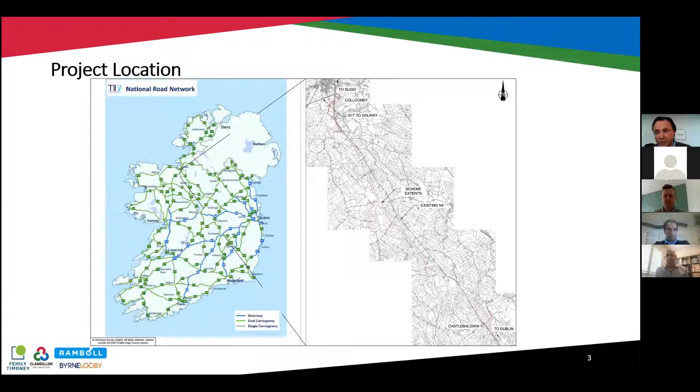The location of this project is just southeast of Sligo town and starts at the Toberbride roundabout in Collooney and heads down towards Castlebaldwin village. The first couple of kilometers are an online upgrade, and you can see the existing road there, hopefully in dark grey. The red outline is the limit of works, which shows where the new alignment is going. Most of it offline to the west of the existing road, curving around to the east and connecting up with Castlebaldwin village towards the south.

The background to the project, if anyone has driven that road in the past, they'll know that it's a single carriageway of varying carriageway widths and cross sections. There's a lot of existing accesses to it, with 24 junctions, a number of houses and field accesses, and that combination means that there's very limited opportunities for safe overtaking, and that's resulted in a number of fatalities over the years. One notable feature of the existing road is those white crosses that have been placed there by local action groups, which you will see if you're driving it in the past.

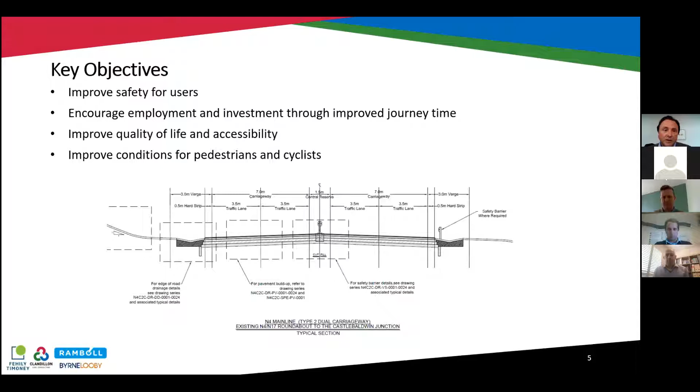So the key objective really is very much improving safety for users. But in addition to that, by reducing journey times, you encourage employment and investment in the region, increasing quality of life and accessibility. And of course, there's a lot of improvements can be made for pedestrians and cyclists in the area as well.

A bit of a timeline to the project. The planning submission would have gone into An Bord Pleanála back in 2013, and the environmental impact statement and compulsory purchase orders confirmed in 2014. They would have a notice to enter then in 2015, with advanced works, including extensive archaeological investigations and ground investigations completed 2016 to 2018. It is an area rich with archaeology and complex ground conditions. Procurement of a design build contractor occurred through 17 and 18, including your standard consultation meetings and the submission of a tender design from the competing parties. Ultimately, that led to an award to Roadbridge and ourselves as designers as the successful design build contractor, with that appointment occurring with government approval in January 2019.

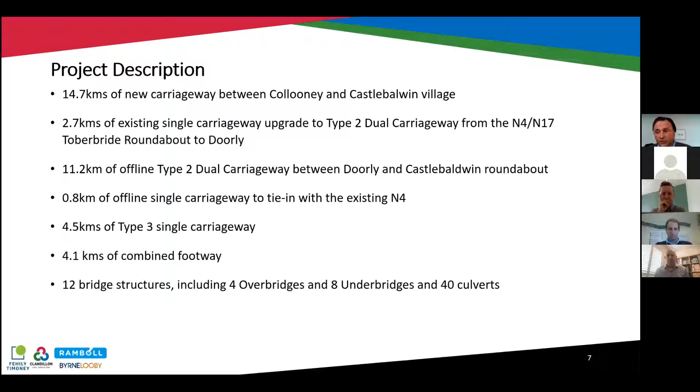Construction's been ongoing as well as design. Design is well done at this stage, but construction's ongoing with a road opening date, hopefully in Q3 of this year. The project itself, you'll hear more about from Sean and Brian and Billy. Essentially, it's 15 kilometres of new carriageway. A portion of that is online upgrade of the single carriageway to dual carriageway, about 11 kilometres of offline dual carriageway, a number of tie-ins and side roads to connect it in, as well as 4 kilometres of footway, a large number of structures, including 12 major bridge structures, 40 culverts, various minor structures of various types.

The key stakeholders: the sponsoring agency employer is Sligo County Council. Sanctioning authority is Transport Infrastructure Ireland. Employer's rep is Barry Transport. The main contractor is Roadbridge Limited. And then ourselves as designers, Fehily Timoney and Company, Clandillon Civil Consulting, Byrne Looby Partners, and Ramboll UK. And then with that, now I'll hand over to Brian, who will take you through the construction.

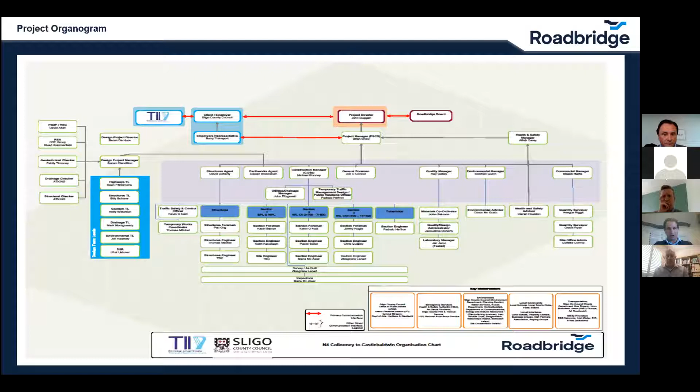Currently we have about 19 members of staff on site. Just a brief view of our organisation chart. At peak time last year, we had in the region of 34 members of staff. Again, at present, we have about 76 operators. At peak construction last year, we had 265 with 150 items of plant.

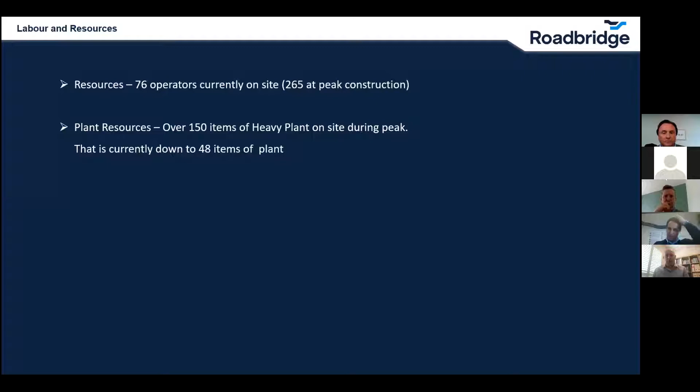Some high level figures in the project. We had 1.8 million cubes of cut material, with almost 1.1 of this cut unsuitable for road embankments. Testing of material was to determine suitability for placement in the earthwork embankment. Tested approximately 1 sample every 1,000 cubes.

All unsuitable material was managed within the LMA and disposed of in deposition areas or upfilling of borrow pits, of which we had 2 number on the project, where we processed and blasted rock to make 1C and 6F2 material. So you can see the numbers there with 220,000 cubes of 1C, 92,000 cubes of capping, 45 of sub-base, 30 of CBM, 24 of base course, 15 of binder and 11 of wearing course, high level numbers.

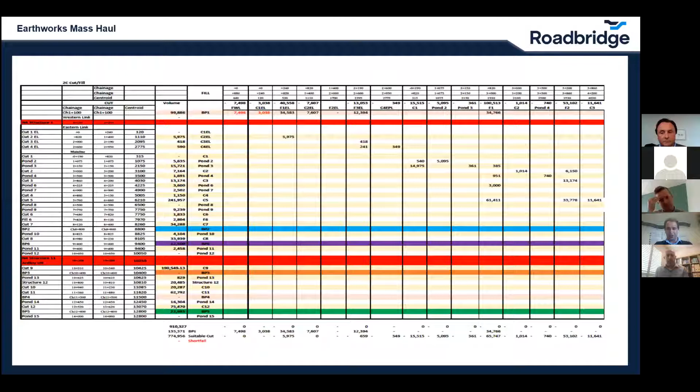There was a mass haul developed at the beginning of the project to ensure the most efficient haul distance used for cutting and filling material. Poor ground material proved a major challenge for us. Peat depths range from approximately 2 to 8 metres, which was a challenge. In peak construction during the summer of 2020, we were hauling about 100,000 cubes per week. Now, weather was a key factor, and in the northwest, it was always a challenge.

12 number structures in the project. First 2.5 kilometres of the N4 from the N17 roundabout to structure 2, which is just 2.5 kilometres. I suppose the scope of works initially was to remove this traffic from the main line onto the eastern parallel link to allow us construct these 2 bridges and the widening and overlay section, which included about 70,000 cubes of fill on the approach to structure 2.

The design of the local roads were generally offline of the existing footprint. Therefore, there was minimal disruption to road users. Road embankments were constructed offline, the bridge was constructed, and then there was a road order in place for a closure to complete the tie-in and divert traffic onto the new alignment.

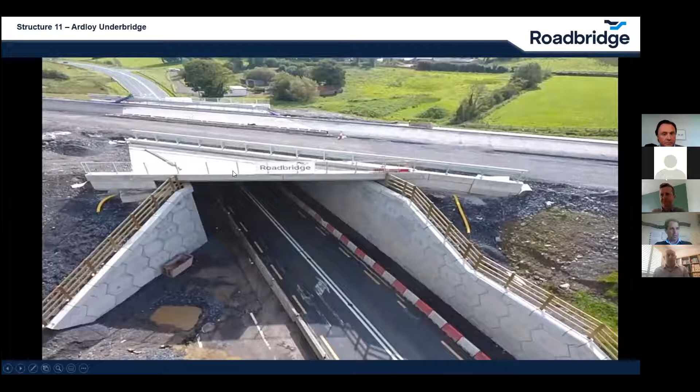Structure 11 at Ardloy then is the point where the existing and new alignment intersect. The structure was constructed without any road closures. The beam lift took place in December 2019, was carried out at night time, and was carried out again with minimum disruption to road users. Just give you an overview of this structure 11 at Ardloy, where you have the existing N4 and the new N4 crossing over it. Again, structure 6, which was completed last year, which is a side road at Drumfin.

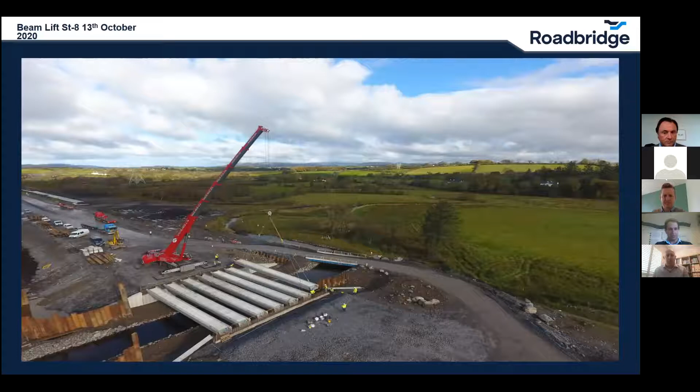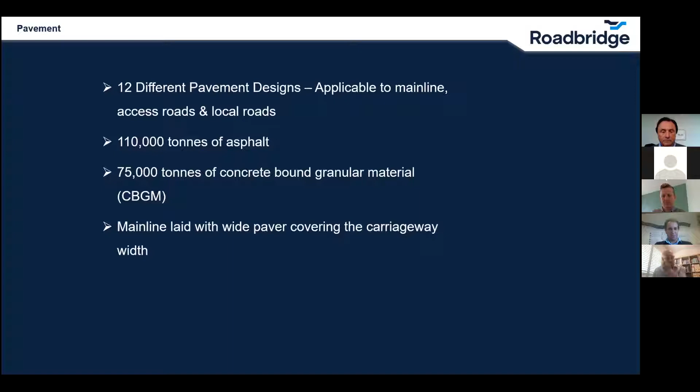So pavement, Lagan Asphalt, our appointed pavement contractor, placing CBGM and asphalt layers. There's 12 different pavement types in the project for mainline, access roads and local roads. 110,000 tonne of asphalt, 75,000 tonne of CBGM. Lagans have used a full width paver, which has increased production and eliminated longitudinal joints and is more efficient than your standard paver. Just a brief shot of the asphalt in operation last year.

Environmental surveys, RB have a dedicated environmental officer on site since project commencement. Walkover surveys were conducted by our Roadbridge ecologists before works commenced to inspect for active habitats. We also identified invasive species and followed TII guidelines for dealing with these, and these included giant hogweed, Japanese knotweed and rhododendron.

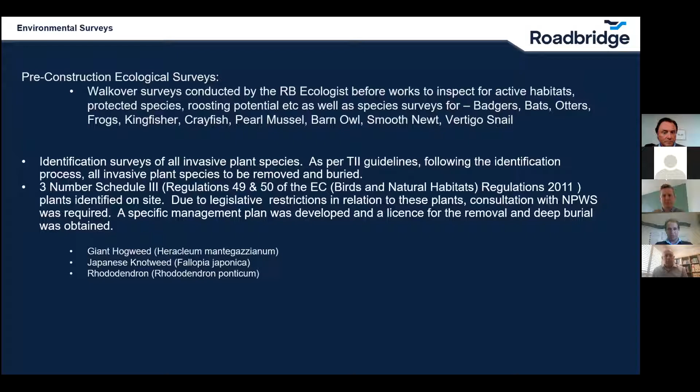Ecological surveys include brash and hedgerow clearance, macroinvertebrate surveys of 11 number water courses to determine water quality using Q value system. Survey results compared year on year to determine impact of construction works. To counteract the removal of a number of badger setts within the LMA, an artificial sett was created and the sett was monitored with a trail camera to determine its success. And following completion of stream and river channels, electrofishing was carried out on abandoned channels.

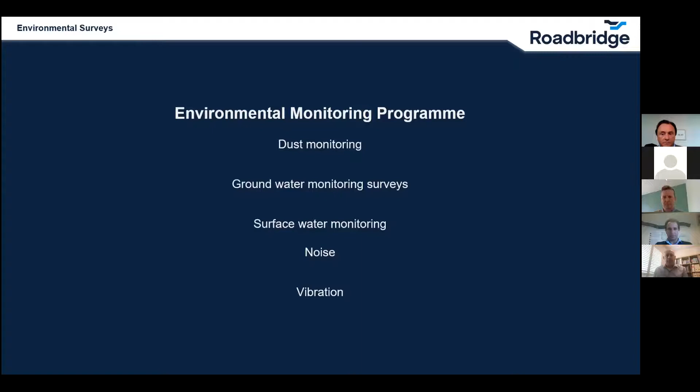Environmental monitoring includes dust monitoring, groundwater monitoring, surface water monitoring, and noise and vibration monitoring. I touched on it earlier. I suppose one of the key elements of the project was diversion of the N4 traffic to the eastern parallel link. So this is the most northern part of the project at Tubberbride, down as far as structure 2.

I don't know, sorry.

So the eastern parallel link runs in line with the main line, ties in with the existing N4 at chainage 2500. That diversion was put in place last September. It allowed us to construct structure 1, Tubberbride Overbridge, and structure 2, Durley Underbridge, along with the earthworks, drainage, ducting, and the upfill of the embankment on the approach to structure 2.

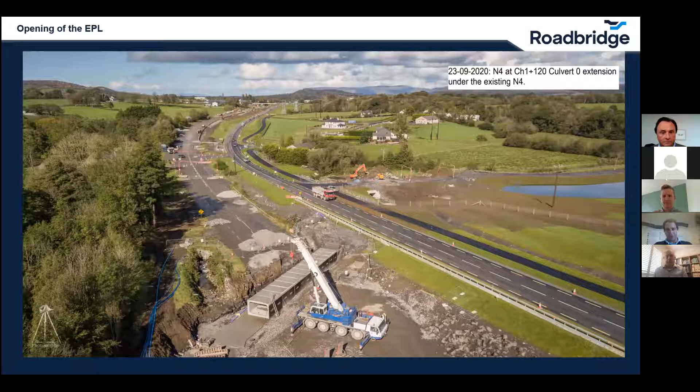That's the photo taken last September. In the middle of that section, you can see the eastern parallel link to the right, where the N4 traffic was diverted to, and the mainline works and culvert installation there at chainage 1120. Again, a photo was taken from last September. Structure 2 in the background, the eastern parallel link with the N4 traffic on the left hand side, and obviously main line in the center.

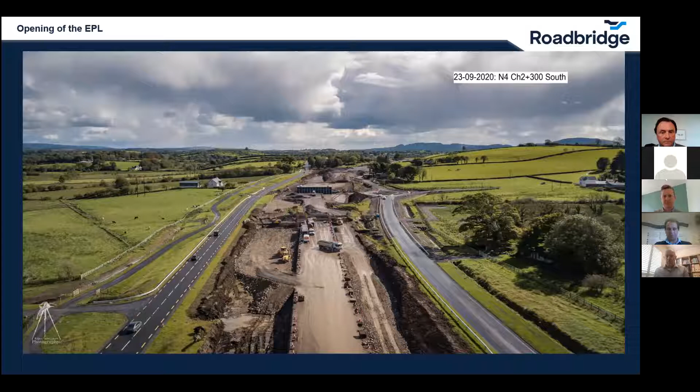So that particular structure had 75,000 cubes of fill imported for it, and then there was a widening operation on the approach to that bridge and all the way back to Tubberbride, which was ongoing for the last few months. It's a more recent photo taken in March. Structure 1 bridge mainline works has progressed since then. Surfacing works in this area will commence next week.

And again, the eastern parallel to the left and the greenway, 3 kilometre greenway to the left of that, again near the LMA. And again, just from the south end of that eastern parallel link looking north, structure 2 there in the centre of the picture.

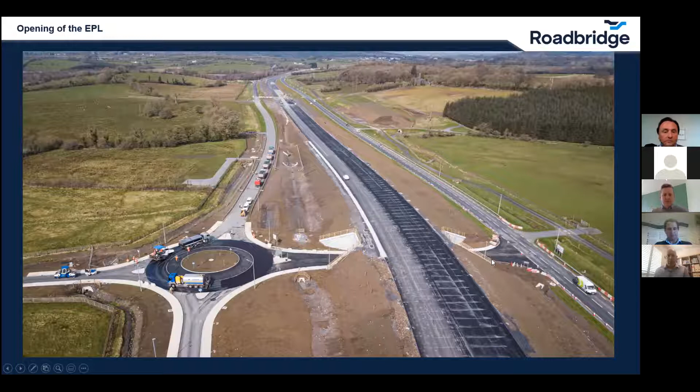Roadbridge are a registered partner of the Considerate Constructors Scheme and agree to the Code of Practice and other schemes. The Considerate Constructors Scheme is an organisation founded to raise the standards in the construction industry. The code is broken down into 5 parts: caring about appearance, respecting the community, protecting the environment, securing everyone's safety, and valuing their workforce.

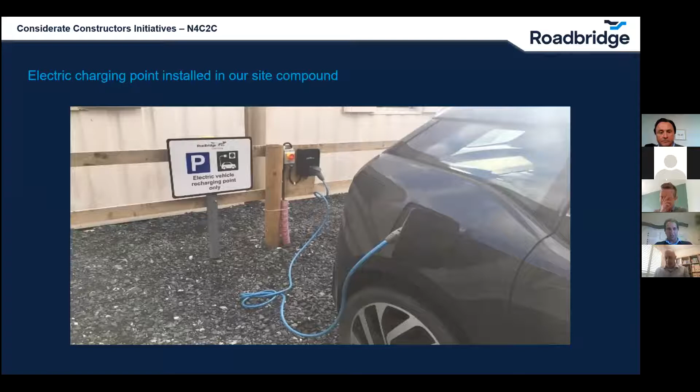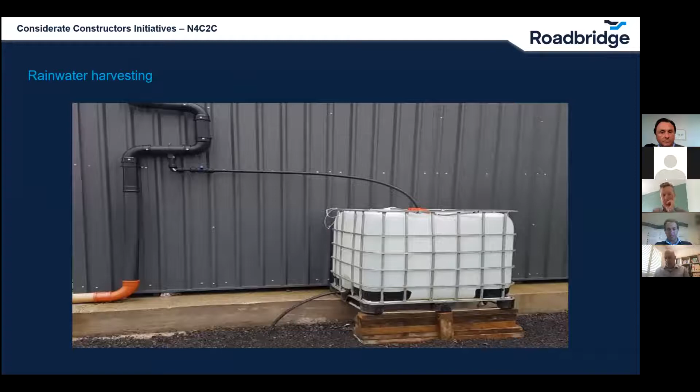Installation of artificial badger setts and a rainwater harvesting tank in our site compound. Use of natural stone and turfing to mimic original channels where there were diversions put in place.

And managing COVID-19, I suppose, has been a difficult year. We're dealing with COVID-19 now just over a year, and managing these processes and procedures has proved challenging. A number of these procedures have been introduced by the CIF, but Roadbridge have also introduced a suite of policies and procedures that are in place throughout all our sites, such as the standard operating procedure and COVID-19 preventative policies for offices and sites, and a COVID-19 site-specific management plan.

So that's it for me. So I'll pass you over to Sean, who will take you through the design. Thanks, Brian. Hopefully you can all see that.

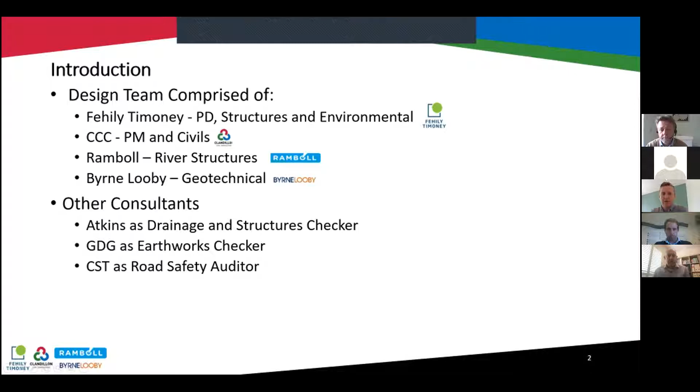So the tender process, I mentioned, was in 2018, and involves 3 consultation meetings with the employer, where the employer, the contractor, and their designer come together to discuss the project and potential optimizations. So you have 3 consultation meetings prior to making consolidated outline proposals, which form the basis of your tender submission, which will be submitted shortly thereafter.

And as I recall, there was also a piled embankment that was due to be provided there, and we were able to avoid the need for the piled embankment by moving out of the worst ground. This is just that same area now constructed. So as you can see there, just to the north of this Tawnagh underbridge, there was due to be a 13-meter embankment, reduced down to 7, which obviously we would hope was a benefit to everybody involved, really. Properties nearby have a much less visual intrusion on them, carbon footprint and construction noise.

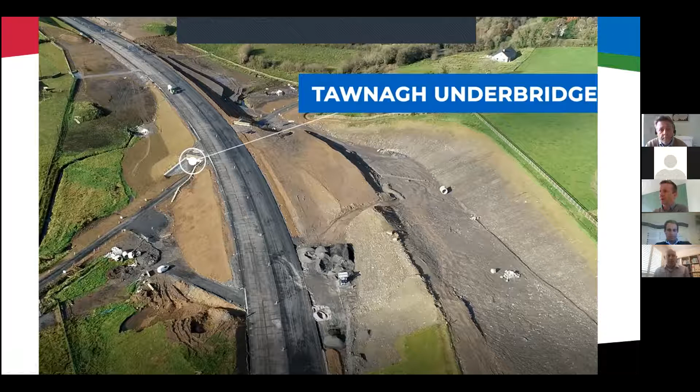Okay. So I'll tell you a little bit about the detailed design. I'm going to talk you through the alignment design, drainage design, the earthworks design, and the pavement design before handing over to Billy, who'll tell you a little bit about the structures. So during the detailed design, we were able to make some further tweaks to the alignment, and we were able to increase the suitable material generated from cuttings by 170,000 cubic meters, and decrease the bulk fill by approximately 140,000 cubic meters versus the tender design.

Overall, and I know there was some debate about this the last time we made this presentation, there was a 30% reduction in bulk volumes versus the specimen design. I've looked back on that, there's actually a 50% reduction in embankment volumes, and the fact that it came down to 30% was just based on the fact that we weren't able to do as much below ground, and probably there was an increase in volumes relative to embankment size below the earthworks outline, where we had to take out soft material. So ultimately, as Brian mentioned, the scheme was balanced.

Scheme balance was achieved through the use of on-site borrow pits. So there's two large and probably one smaller rock borrow pit, which serve to provide rock for the project, and also areas where unsuitable material was disposed of. Okay, that's just a photo there of one of the borrow pits. You can see the size of it by reference to the excavator at the base.

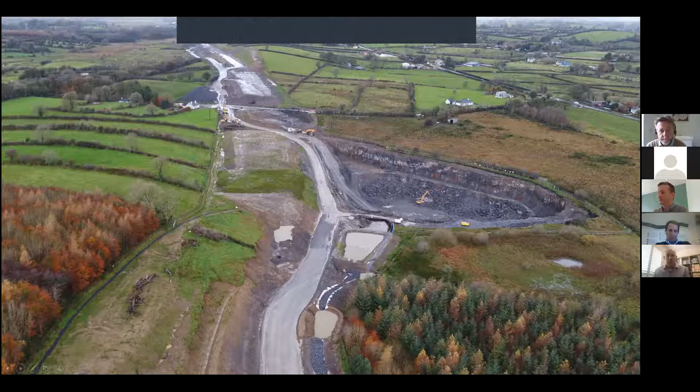It's just a quick video. If I can play this, just again giving you an impression of the size and scale of the operation. That borrow pit there is probably only halfway through. There's another couple of lifts down from the level you see there, but a large undertaking in and of itself.

Okay. So just to tell you a little bit more about the alignment design, one of the initiatives we tried to progress through the detailed design was along the eastern parallel link road, which Brian referred to earlier. So in the concept design, there was a footpath provided alongside the eastern parallel link. We sought to change that from a footpath to what is effectively a greenway designed to greenway standards by moving that out towards the fence line. So the intention there was that we'd increase the amenity and safety for users, but also that we would reduce the earthworks, as a lot of the EPL is up on embankment or relatively deep cutting, whereas outside the fence line we would typically be able to keep it at grade.

So we reduced the earthworks, but we also reduced the drainage works quite significantly. So you'll probably be able to see that there was a kerbed and closed drainage system initially in concept design, and we were able to change that to SuDS drainage systems, effectively either over the edge or filter drains with no kerb, once we'd moved the footpath to the fence line.

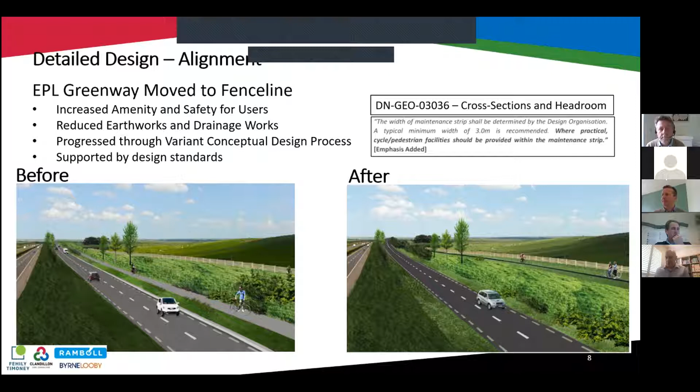So as it was during the detailed design stage, we had to progress that proposal through what's called a variant conceptual design process, whereby we put together a technical submission for the employer and put it to them to accept that proposal and see the merit in it, which they duly did. This proposal is something that's supported by the design standards in Ireland at least. One of the standards says where practical, cycle and pedestrian facilities should be provided within the maintenance strip. Probably, I would suggest, something that we're going to see more of on projects in Ireland going forward.

Just to tell you a little bit about the drainage design then. I suppose from the outset, we placed a fairly heavy emphasis on the use of SuDS drainage systems.

There's sustainable drainage systems such as filter drains, swales, grass surface water channels, rather than concrete systems. But one of the reasons we place such an emphasis on the use of SUDS systems is because we believe that SUDS systems are necessary if you're going to control the volume of runoff from your site. So attenuation ponds do a good job at controlling the rate of runoff from development, but they're not so good at controlling the volume of runoff.

So just one of the SUDS systems that we developed was the use of a lined grass surface water channel. We did require a departure from standard to use this. So the departure was granted based on the contents of the EIS for the scheme, which envisaged the use of a lined grass surface water channel. We also noted in our departure application that there's a contract requirement to use SUDS systems.

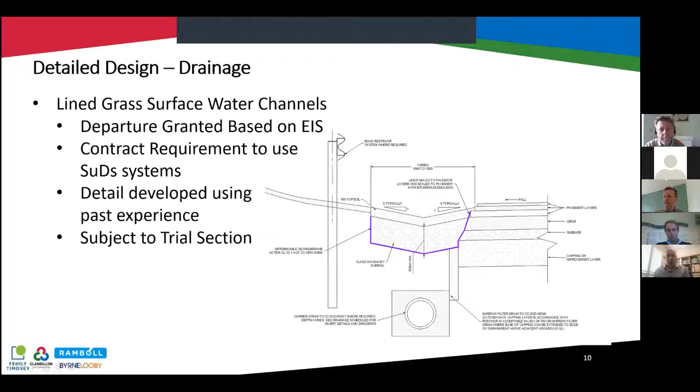One of the other systems we used were linear attenuation systems. So in Ireland, unlike in the UK, we are allowed to use something called over the edge drainage, where the water from an embankment is allowed to flow over the edge, over the verge, down the earthworks embankments, and into a collection system at the base of the embankment. Subsurface drainage in that instance is provided through the extension of the capping layer. So in this instance, the over the edge drainage was down to a swale or linear attenuation system.

So the linear attenuation system A collected the water, B treated it, and C attenuated it. So it's doing the job of what might otherwise be done by three different systems. And going back to the alignment design, you can see that we have just about enough LMA there on both sides. It was a happy coincidence that the earthworks optimizations had reduced the embankment sizes and generated more space within the LMA in order for us to fit these linear attenuation systems in.

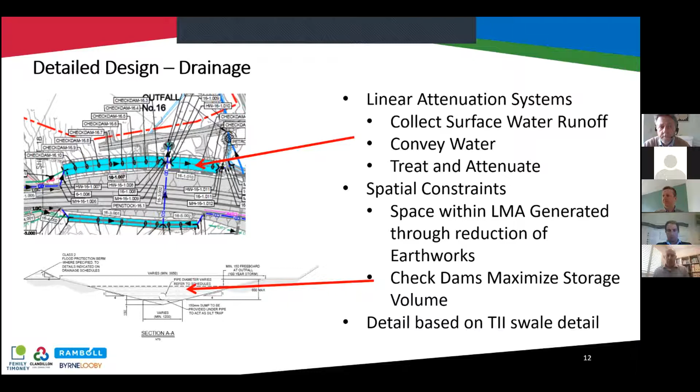Just on the earthworks design there, so Brian outlined the volumes associated with the earthworks. So you're well into the million meters cubed of earthworks, 760,000 meters cubed of unsuitable material, which was largely peat, also marl and alluvium. So typically it was a dig and replace methodology that was employed through probably 90% of the scheme.

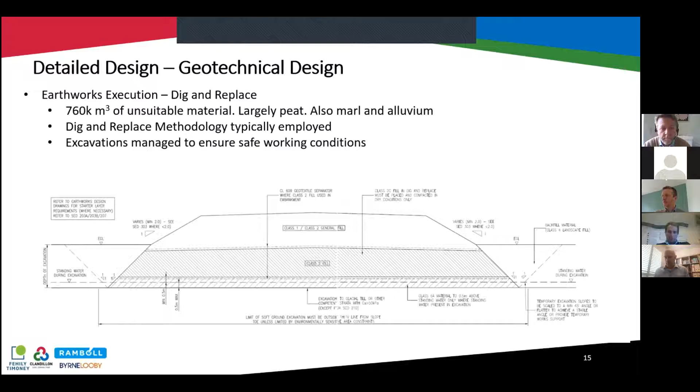And below here is a typical detail that we would have used for the excavate and replace. Some people might be familiar with that detail from other projects. It's a similar detail to what was used on other schemes. There was one section where we used vertical drains and surcharging. So that was just at the southern tip, where we're coming back online with the existing N4.

So it's just a 150 meter long section. So in the first instance, all the organic peat material is removed from the cutting. But at that stage, there's still marl and alluvium up to 10 meters deep. So in order to ensure that material was fully settled prior to road construction, there was a surcharge embankment placed on top of that material. The height of the surcharge embankment was 2.5 meters.

Vertical drains were installed through to relieve the pore water pressure. They were installed at 1 meter centres on a triangular grid. And the design surcharge period was initially 7.5 months, with instrumentation and monitoring installed to monitor the settlement. So ultimately, I believe the surcharge period based on the monitoring results was brought down to about 6 months. It was actually just taken off. It was the last thing to be done prior to the first lockdown.

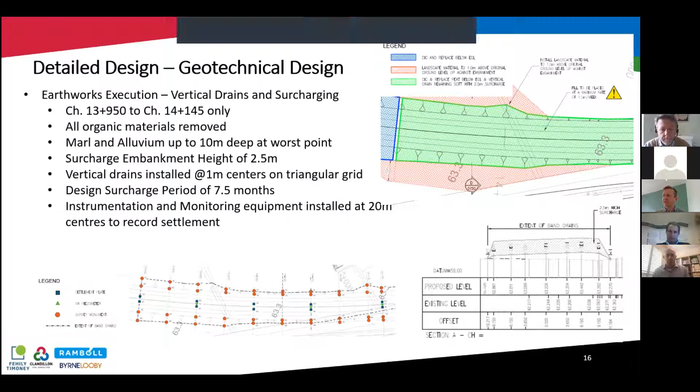Okay. Just one other interesting element was the use of counterfort drains, just to assist with slope stability. So shallow and deep drains were used. The requirement for the counterfort drains was based on piezometer readings on site and also site observations. So the depths were typically limited to 2 meters, and they were installed at 2 meter centres. Where otherwise it would require deeper drains, berms or additional toe drains were installed to limit both the depth and the number of the counterfort drains.

Just to tell you a little bit about the pavement design: on the online section, we sought to incorporate the existing pavement into the new pavement. So we'll have a look at some video later to see where that's been incorporated. But in order to do that, we carried out a suite of testing that included FWD tests, assessment of cores, ITSM testing, DCPs, and visual assessment.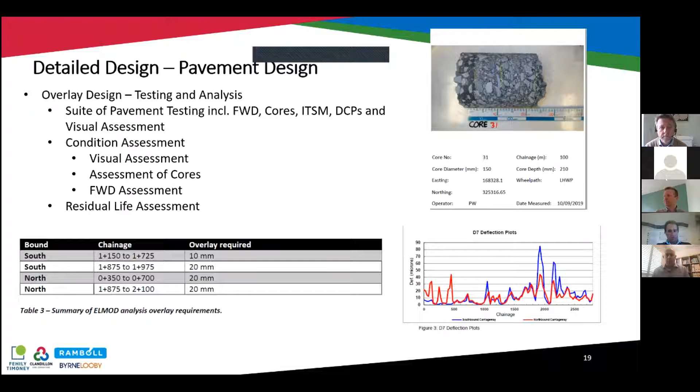I might just hand you over to Billy at that stage, who's going to talk you through the structures design.

Sorry, I'm just having issues sharing there. Not going to be sorted out. Okay.

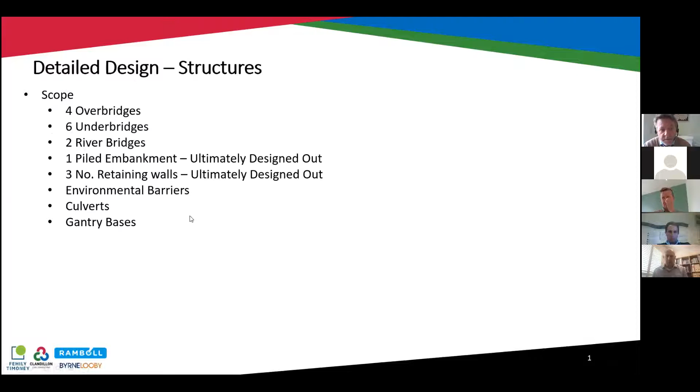Okay, so I'll just give a brief run through the structures on the scheme. There were 4 overbridges, 6 underbridges, 2 river bridges. There was a piled embankment originally proposed, but that was ultimately designed out, along with 3 retaining walls and a number of ancillary structures, including environmental barriers, culverts, and gantry foundations.

Just to run through the overbridges first. They're all fairly similar construction, 3-span integral bridges constructed using W9 precast beams and in situ concrete decks. Intermediate supports were columns on ground bearing foundations, and the abutments were high level bank seats, again on ground bearing foundations with 6N fill where required from suitable bearing stratum.

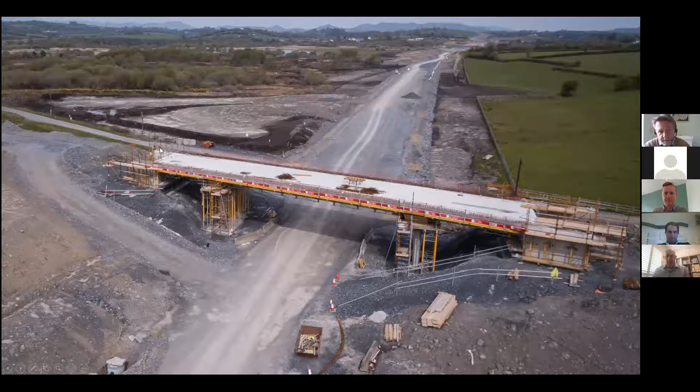There's just some pictures of one of the bridges being constructed. So these are the foundations and the intermediate support columns in place. This is it with the deck almost complete, just the parapet edge beam remaining, and that's the final overbridge structure there.

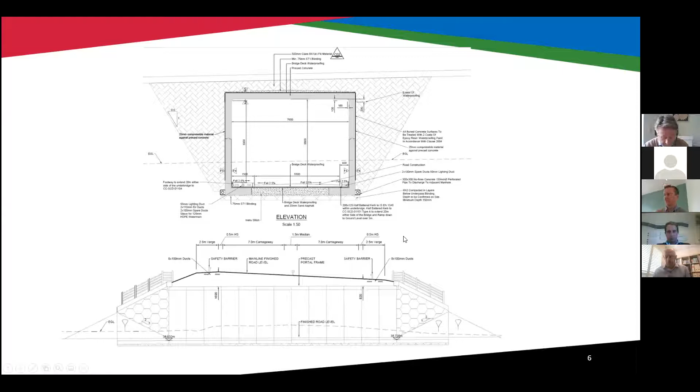Of the 6 underbridges, I think 5 of them were this precast concrete box structure, buried structures underneath the main line. They were all about 7.6 meter span, varying length depending on the skew of the road under the main line. Again, just some photographs of them being constructed. Obviously the box structure in place here being backfilled, with the reinforced soil wing walls being constructed at the same time. That's one of the final structures there.

There was one, structure 11 there, over the existing N4 carriageway. I suppose this was a high skew structure. I think the main line crosses the old N4 at about a 40-degree skew. So the structure was squared up to 25 degrees. So it has triangular dead areas on both sides, with the main line in the center of the deck. It was constructed using M7 precast beams with infill concrete then for the deck.

Abutments were high-level bank seats founded on reinforced soil embankment abutments. So this was a slight change from the specimen design. The specimen design had columns coming down to a low-level bank seat. We managed to change the proposal here slightly just to ease construction. So it's simpler to construct the reinforced soil abutments and construct the bank seat at high level than to do columns and have to thread your reinforcing straps through the columns or around the columns.

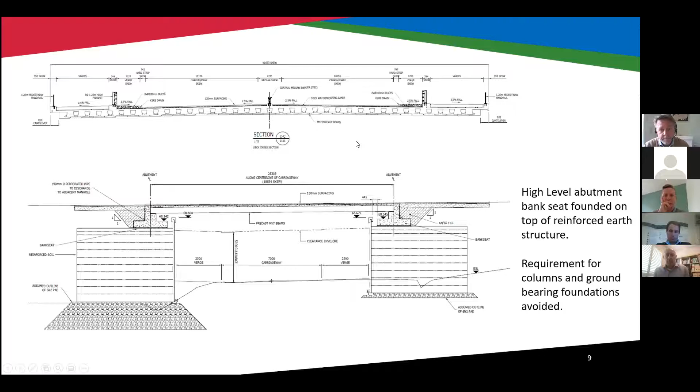The bridge span is about 19 meters along the skew, with a 12-meter carriageway width below the structure. Again, this is just the reinforced earth abutments being constructed over there with obviously the live carriageway on the existing N4, and that's the finalized structure there over the existing carriageway.

The 2 river bridges were quite similar. They're about a 20-meter clear span, integral structures with W3 precast beams, in situ concrete deck slab with in situ concrete abutments. There were a few modifications made here during the detail design. We managed to reduce the clearance requirements here from 4 meters down to about 2 meters, which helped obviously with the embankment height on the approach to the structures.

Again, this was done through additional bat surveys and a review of the EIS requirements to confirm that the original 4-meter clearance could be reduced. Additionally, one of the river bridges, structure 8, was originally proposed to be piled. These rivers were to be diverted underneath the structures. So just by moving the structure slightly and increasing the length of the river diversion to a location where there was better ground, we were able to remove the need for piling, and there was ground treatment required, which was excavate and replace.

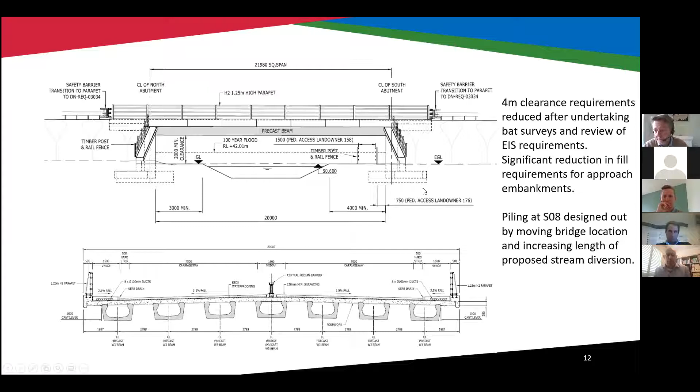So these would have been built up off 6N, and the abutments constructed then on top of the 6N material below. Again, this is a picture of the final structure, and I think that's it. I'll hand you back again now.

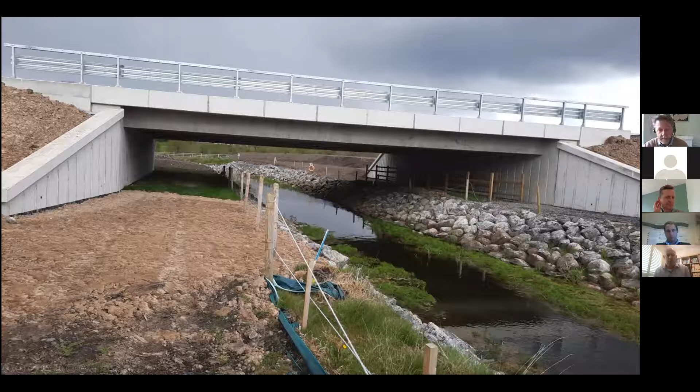Thanks for that, Billy. So some very good presentations there. At this stage I think Sean is going to show us a video, and while we're watching the video, we're just going to do some Q&A over that. There's actually no sound on the video, so if you're wondering why there's no sound, we'll use the opportunity while the video is playing to do some questions and answers. So the chat facility is there if anyone wants to add their question to it.

But I might just kick off myself with a question, for Brian. In your presentation, you mentioned the Considerate Constructors Scheme. And I just wondered, were there incentives in that, or how do you account for such good scoring in that scheme?

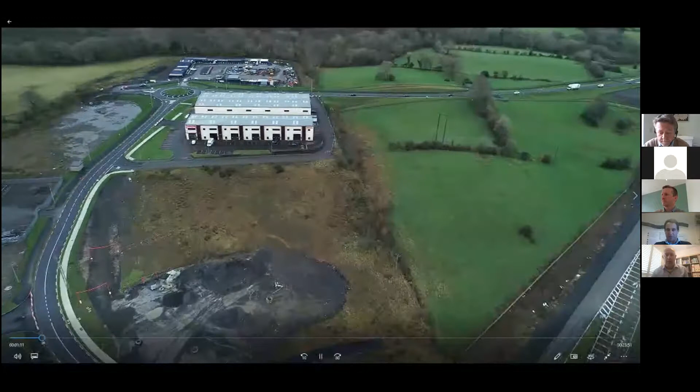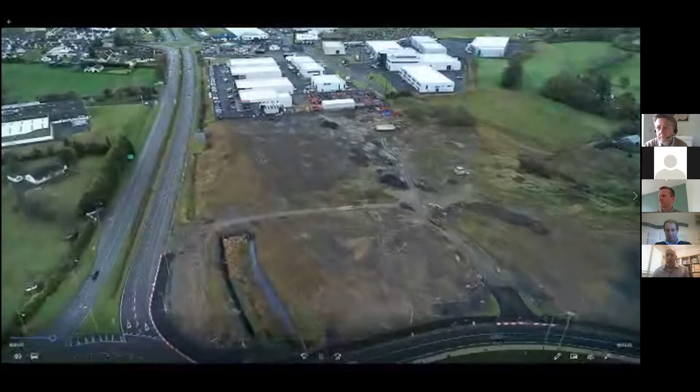I think, Liam, it's something that the company has bought into over the last 7 or 8 years, and with the fact that we're a partner with Considerate Constructors, all our employees are used to delivering a fairly high quality product, to be fair to them. Each one of them has bought into it. So when you have that from the employees and from the staff, it certainly makes things easier. And we feel as well that we're giving something back to the local community. We're on a project for 2 to 3 years, and it's always good to feel that we have contributed in some capacity, be it to schools or to local businesses or whatever the case may be.

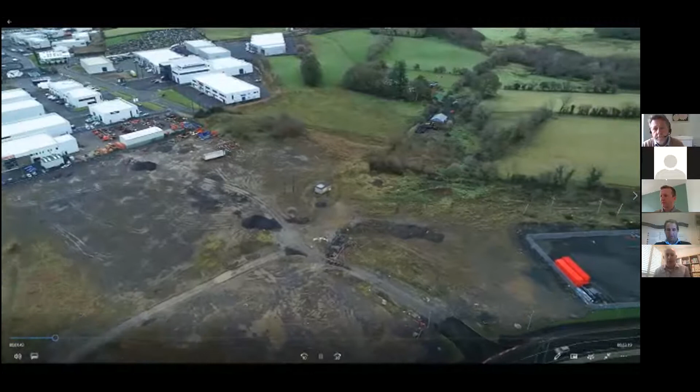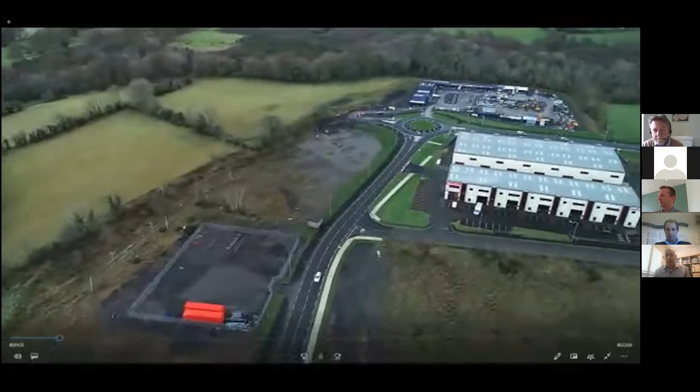Very good. Sean, do you want to jump in and just talk a little bit about what we're watching on the screen? Yeah, I can. So if you've got any questions as we go, just feel free. If I jump back just a second there, we're looking at the east-west link. This video is obviously sped up; the cars aren't actually traveling that fast. But this is Toberbride roundabout there, Roadbridge compound behind it. And so we're just about to start looking at the eastern parallel link.

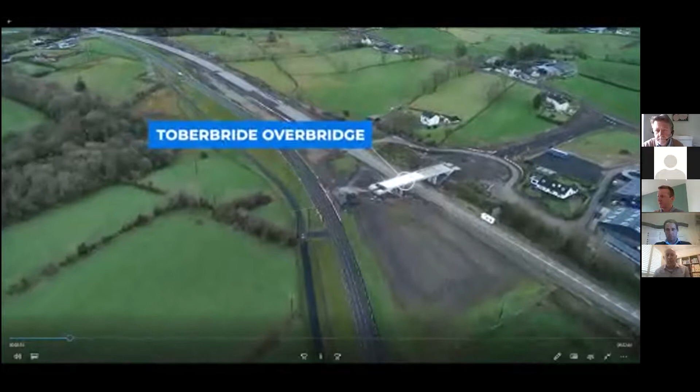The N4 traffic was diverted onto this road. So we can see over to the right, the old N4 traffic's now been taken off, and the traffic has been moved on to the eastern parallel. What you're looking at there is quite a large embankment, and as part of the design I mentioned, we moved the cycleway over to the side there so that you don't have the same earthworks associated with the cycleway as for the traffic road, and it's away from the road. But you can see the works progressing there on the online section, so that pavement's been broken out while the traffic has been diverted onto the new road.

Very good. Sean, maybe a question for yourself while the video is playing. You mentioned in your presentation an area where you were enhancing the biodiversity. To what extent do you find, for projects like this, that the biodiversity issue is becoming more of a focus, or is it an increasing consideration?

So I suppose it starts with the EIS. The EIS would have identified a number of environmentally sensitive areas associated with the scheme. So there's a number of fens and loughs, and you can see one of them here, Clandillon Lough. So the first thing to do is, as part of your route selection, you consider the environmentally sensitive areas around the scheme and avoid them as best you can.

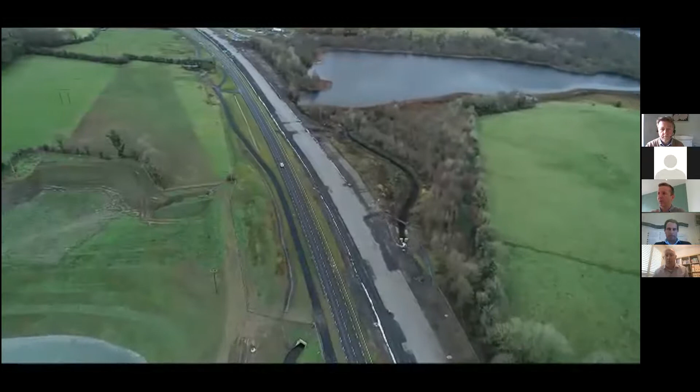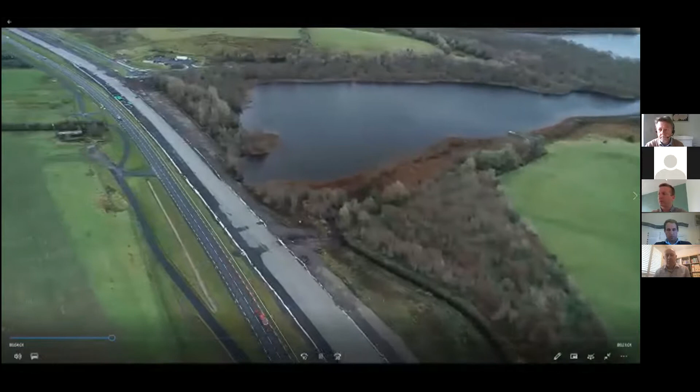And only afterwards, as you progress, you start to talk about mitigation measures. There were a number of mitigation measures associated with the environmental schemes. You can see just down at the bottom corner there's a weir associated with this lake to maintain the levels in the lake. We replaced a pipe culvert with a 3x2 box. So the weir was installed to maintain the levels in the lake and to ensure that it doesn't drain more than it did in the pre-construction scenario, which might affect the ecology in the area.

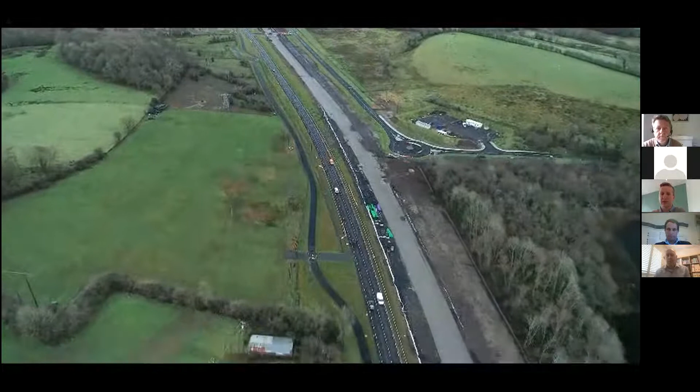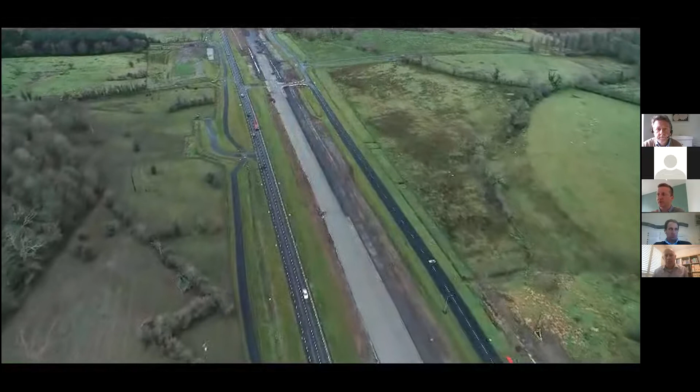And then further down, there were particular measures associated with other fens and loughs that we come to. And in addition, there's a lot of different landscaping requirements that focus on replacement of natural habitat like for like, or improving the natural habitat. As I mentioned, as part of the drainage design, we sought to use SuDS systems. So it's probably a long-winded way of answering the question, but there is and has been for a while significant focus on the impact of the road schemes.

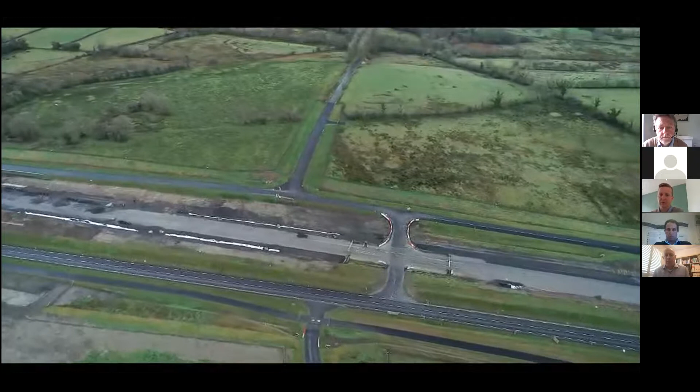Probably what's still missing is an overall carbon footprint assessment of these schemes, and I think it would actually be helpful from a designer's and contractor's point of view to have a carbon score and a carbon target. It certainly would have helped us get some of the opportunities over the line if we had a carbon tool, a carbon goal. Because anytime we're reducing embankments, anytime we're using SuDS drainage systems, we're reducing the carbon footprint of the scheme as well. So it would be nice to see those goals incorporated into the schemes going forward.

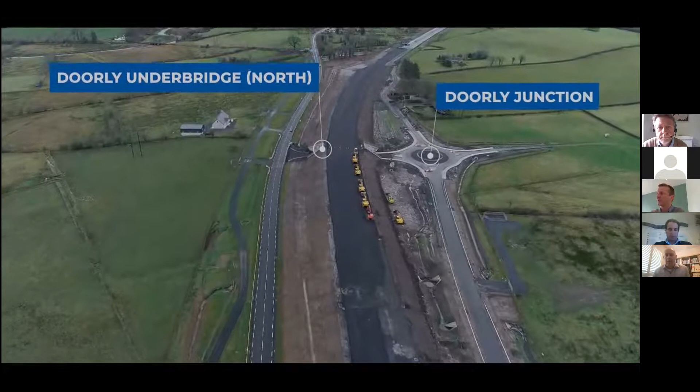Yeah, very good. Thanks for that, Sean. We have a question in the chat there. Was there much flood risk you had to consider as part of the environment/drainage planning? So the risks of flooding as part of the scheme.

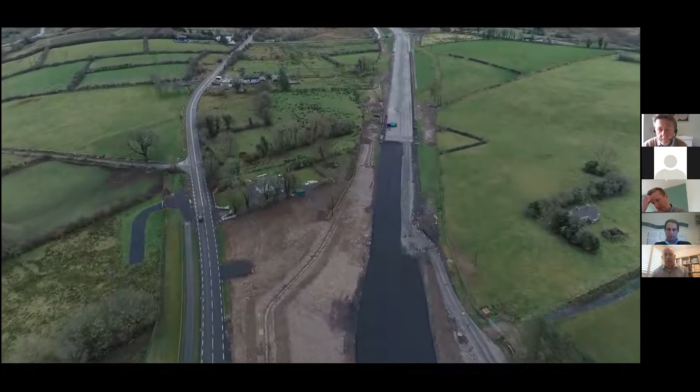Yeah, so again, that starts at the EIS stage. The environmental impact statement would have carried out a full flood risk assessment, and that's what would have dictated a number of the sizes of the structures and the river bridges that Billy went through. Typically clear span structures over the two rivers, and a number of large box culverts as well. So that would have been covered initially in the EIS, and we subsequently did our own flood studies to confirm that we weren't increasing flooding upstream or downstream.

I would just approach it as we speak about the environmentally sensitive areas. This large area here, you can almost see from the discoloration and the difference in colour, is a wetland and a large fen area. And there's a number of measures incorporated into the design and the works requirements to ensure the protection of that fen area, and particularly that the water that got there in the pre-construction scenario still gets there post-construction.

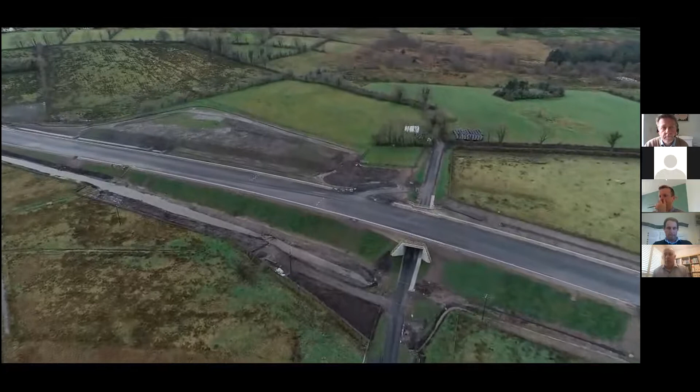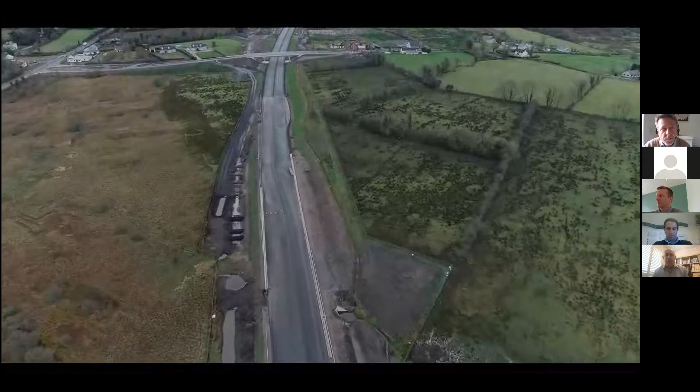Very good, thanks, Sean. Can I just ask Billy, in terms of the structural design, which of the structures did you think was the most challenging on this project? I suppose these structures were all fairly straightforward. There was no unusual large span structure or anything like that. Of them, the 3-span overbridges are probably the more complex, in that they're the largest spans on the scheme, and the multiple-span integral structures were probably the more complex of the different types.

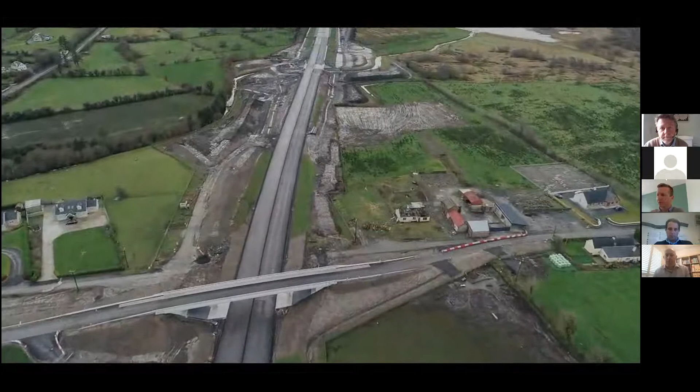From a procedural point of view, Billy, I suppose the change from the 4-meter clearance to 2-meter clearance. Yeah. For the river bridges, it took some time to get the various bat surveys in place, and convincing the client about the 4-meter clearance requirements that they had specified, I think it was specified to allow a particular type of bat to fly underneath the bridge along the river.

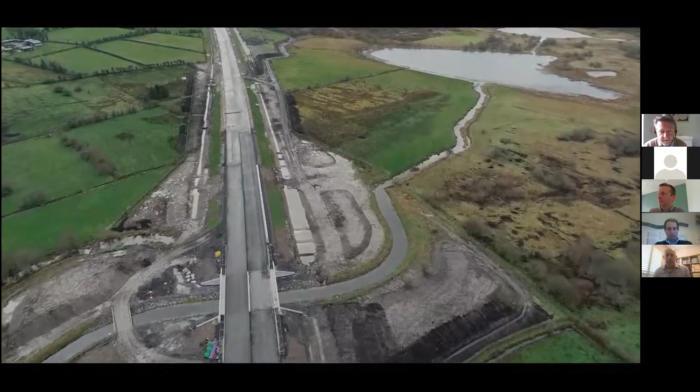But I suppose our surveys concluded that that bat wasn't really present in this location, and we were able to reduce the height. But it took a while, I suppose, to go through all that with the client. It's just a process that you need to go through, and obviously it requires interface from the design team. So it would have required interface between the line designer and structures with Billy and the environmental team as well.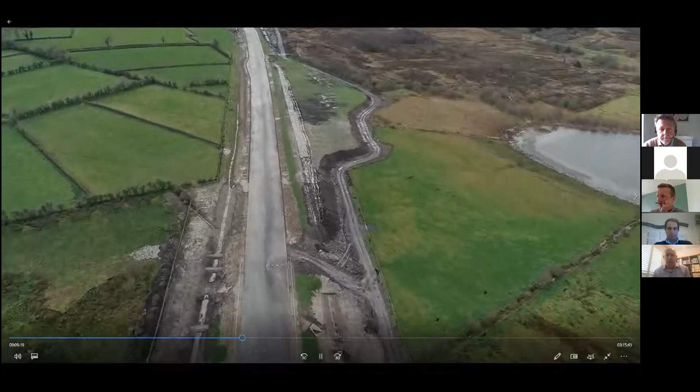And then obviously we would have carried out consultations with IFI, not with IFI, but the input of NPWS, in respect to that. And then obviously you develop all that up into a report and submit it for approval with the client. You can see here, as we go through the flythrough, some of the swales taking shape. As I mentioned, a lot of the drainage is over the edge into linear attenuation systems, and we'll see some good examples a little further on.

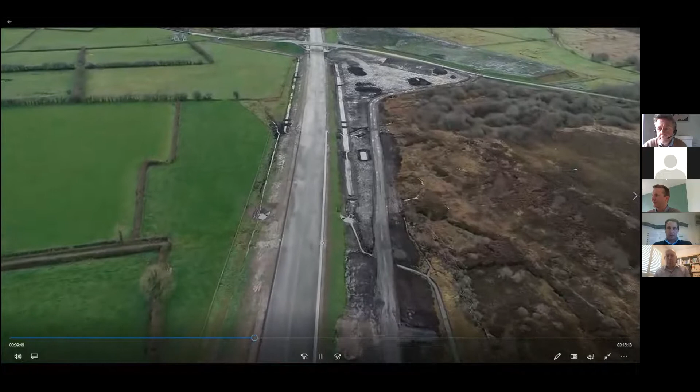One of the other elements is the deposition area. So as we go, we should probably point out the deposition areas. There's a large one just on the right. I think previously we mentioned that all the unsuitable material is stored online. I'm taking your role here, but some large deposition areas here, and every scrap of land on the job is probably used up as a deposition area.

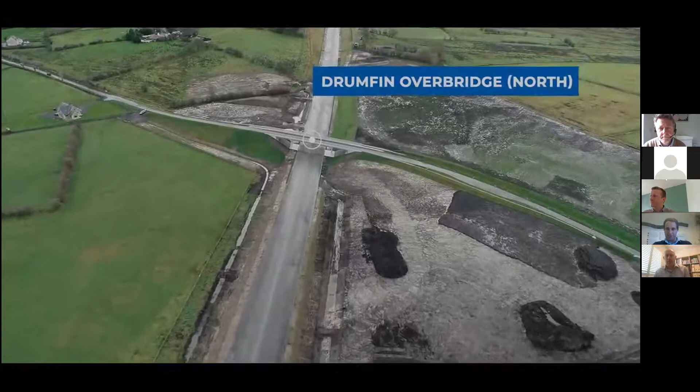Yeah, and I suppose management of the substantial quantities of peat was a challenge. The LMA was quite generous in places, and you can see there's 3 or 4 fairly substantial areas where we created cells and deposited peat. Particularly in the northern half of the project, it was quite difficult. But the LMA allowed us to manage all the unsuitable material within the LMA, and negated the need for any material to go off site, which was a real bonus.

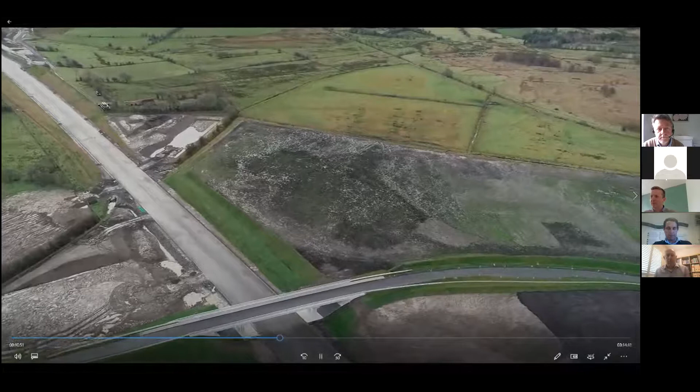Just to give you an idea of scale, this section of the road would originally have been on a very small embankment, and this side road would have been on quite a large embankment. By virtue of the deposition area, you can see that the road's now effectively in cut, so that tells you the scale of some of the volumes of materials. And this video was taken in December, so it'll be greening up as we've gone through spring.

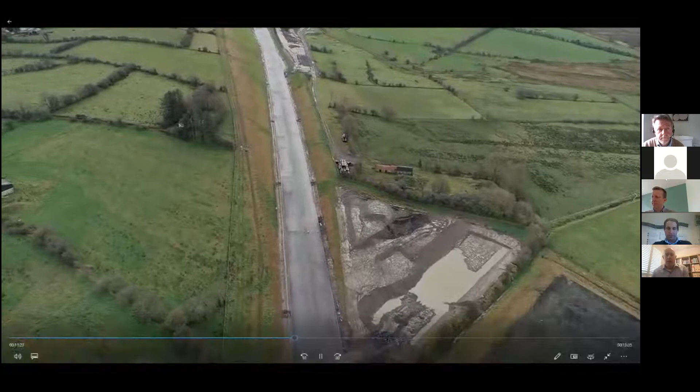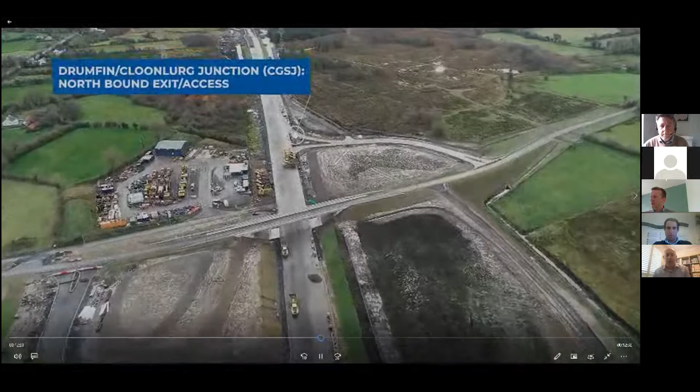Okay, we're getting close to 1 o'clock. Sean, are there any bits of the video that you want to jump forward to, or particular highlights before we finish up? We see the compact grade separated junction there. Might just jump up to the end and the tie-in point. Have a quick look. This is coming up to the second river bridge on the Drumfin River.

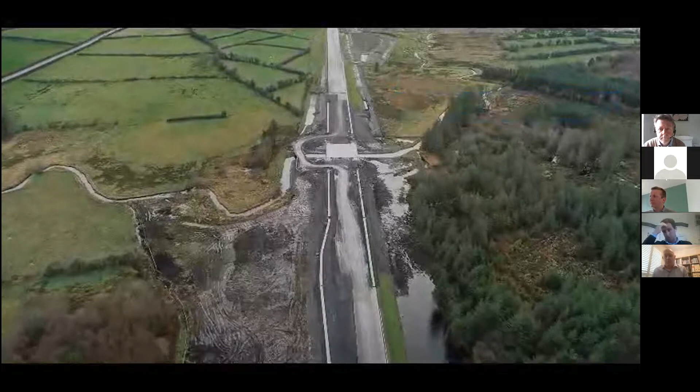There's quite extensive flooding through this area. Somebody's asking about flooding and flood risk assessment. This was known to the design team as we entered into the detailed design and construction, and would have been taken account of. The shoulders of the embankments were designed with, I think, class 1 material to cater for the flood waters that we know to be present there. A 20-meter span structure there, and you can see a couple more examples of swales and the linear attenuation systems just along there.

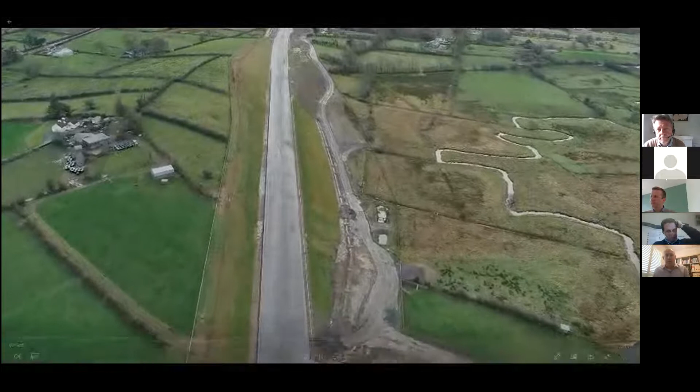Let's jump through. Brian, we mentioned previously that the construction of the embankments on the side slope is another challenge. The benching in. Yeah, as you look at the overview there, you had a cut embankment on the left hand side and fill on the right. So essentially, our new N4 was constructed on the side of a fairly steep slope, so that step detail would have been quite challenging.

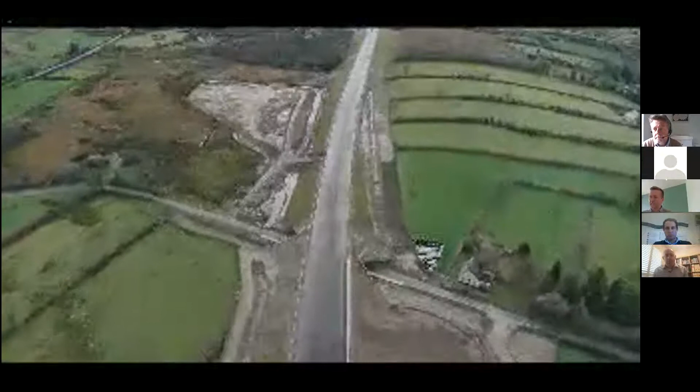Generally, material from the cut embankments was usable in the fill embankments. It was where the fills had peat, where we took it down up to 8 meters. That was one of the biggest difficulties in the project. A couple of good examples there of the linear attenuation systems on either side. This deposition area here is, I believe, the one we showed earlier, with the rock excavation area, all backfilled now.